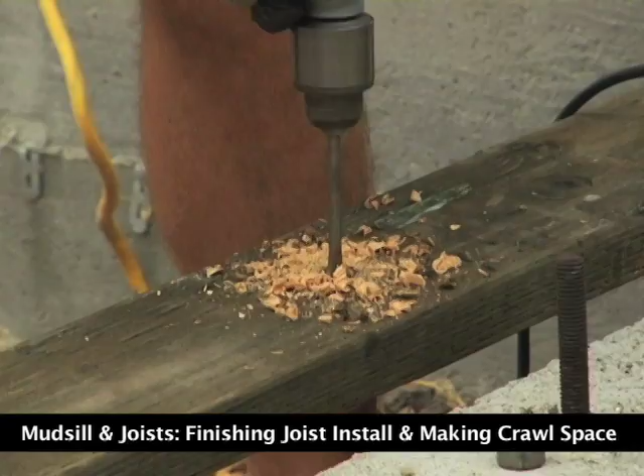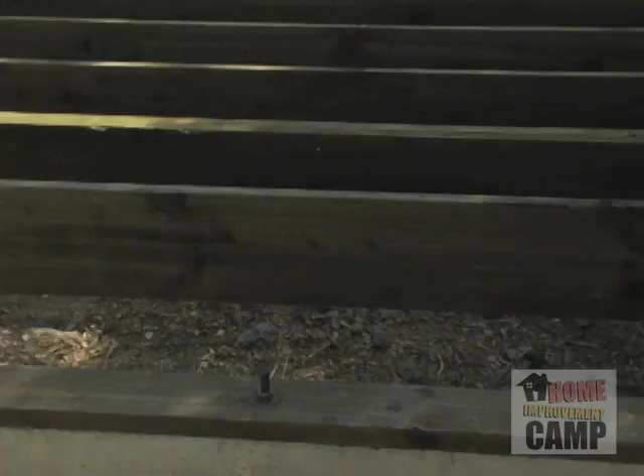All right, so what I'm doing here is I'm cutting some blocks because we have a rim joist on one side of the project here, and we have cantilevering joists. So in between these joists, we have to put blocks to keep them from twisting.

So since our layout is 16 inches, take 1.5 inches away from that, so it's 14.5. But we take a smidgen more, so generally we do 14 and 7/16. So we make a mark at 14 7/16 and we cut a bunch of blocks, and we have those on hand, so as we're laying joist after joist after joist, we can tie the blocks in as we go.

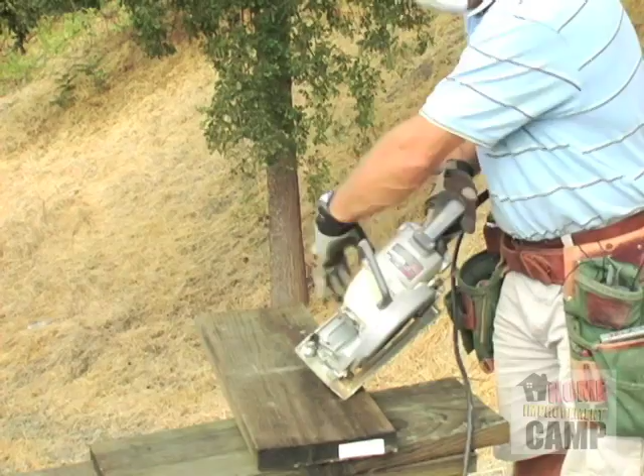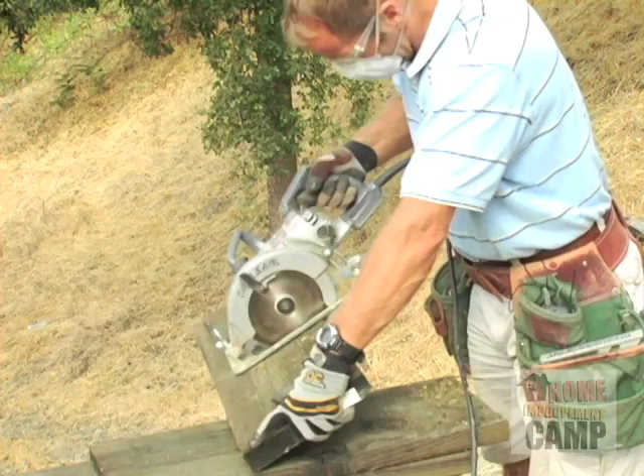So here I've marked it 14 and 7/16. Making sure that my block will fall away when I cut it, and I don't want any binding, so I hold it on this side and cut it on this side. All right, I'll count out how many I need, and I'll cut those out, and then we'll lay the joists.

I'm going to start at the far end, so I've measured from the inside of my rim joist to my first line. Now, if the X is on the far side of that line, you'd have to take 1.5 inches off. But since my X is on this side of my line, and my rim joist is here, I measure to that line, and that's 5 5/8.

So my first joist, since my layout started on this side and went all the way down there, I have a smaller area between my rim joist and the first joist in the far end. Hope this isn't confusing you. But the bottom line is, since I'm starting at the far end, I've just measured what I need to get on layout. Put that small block in there, and then I'll put in my first joist, and then I'll be on layout, and we can just come right back to our starting layout.

If you want, you can start on the beginning of layout, which is probably simpler. I'm just doing it because it's easier to see when I'm down there. But you can start on layout and just keep going and going and going.

Now bear in mind, here's a note that on your layout, your first joist will be kind of like a rim joist, and then your second joist will be cut. That distance will be a little bit shorter, say 3/4 of an inch shorter, because on layout, well, it just will. I don't have to get into it too much.

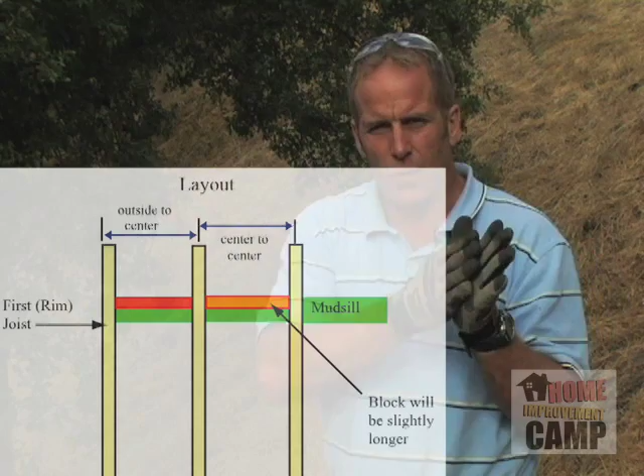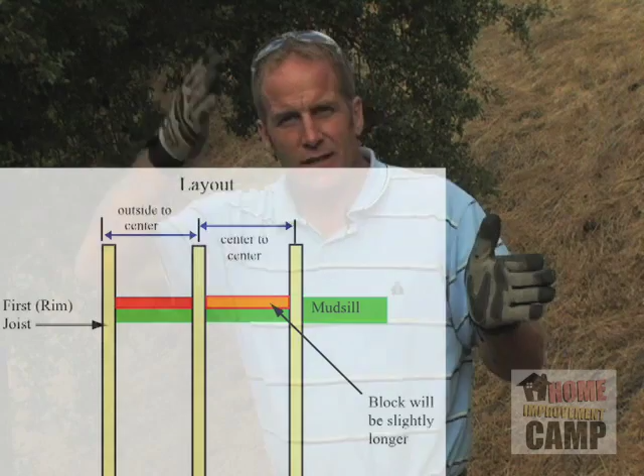So when you cut your first block to your first joist, don't get all worried that it's not 14.5 inches. It will be a little bit shorter because you are starting from 0 and getting to the first center line. Every other joist will be edge to edge, or center to center, but on the very first one it's outside to center, so it does change the first measurement. The very first layout is outside to center of joist, and center to center, and center to center.

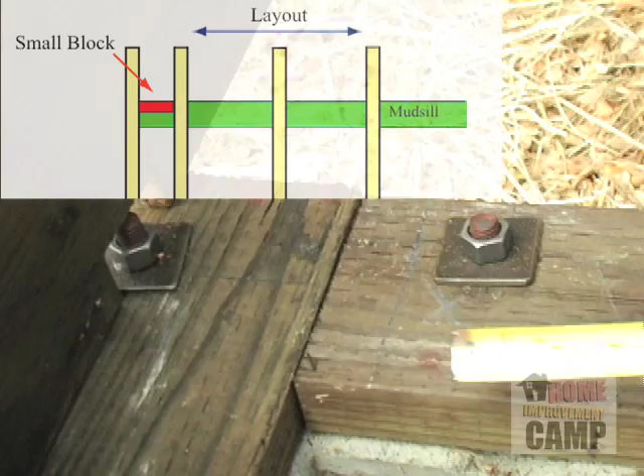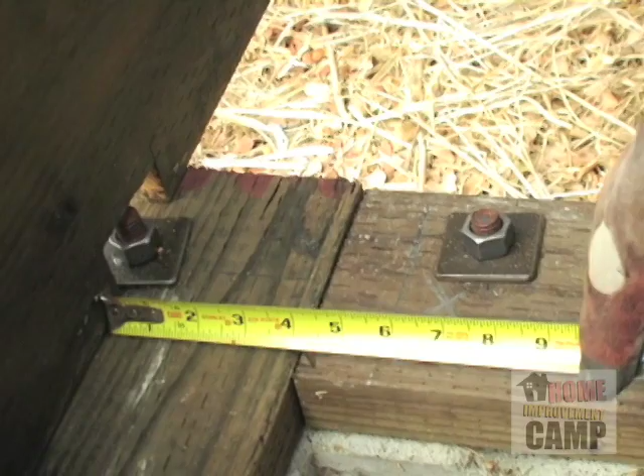All right, we're down here at the end, and we put our tape measure down, and it's just a tad over 5 5/8. So it's 5 11/16. So what we'll do is we'll cut one that's 5 11/16, and then we'll get back in here and we'll put in our next block, which will be on layout, and continue on.

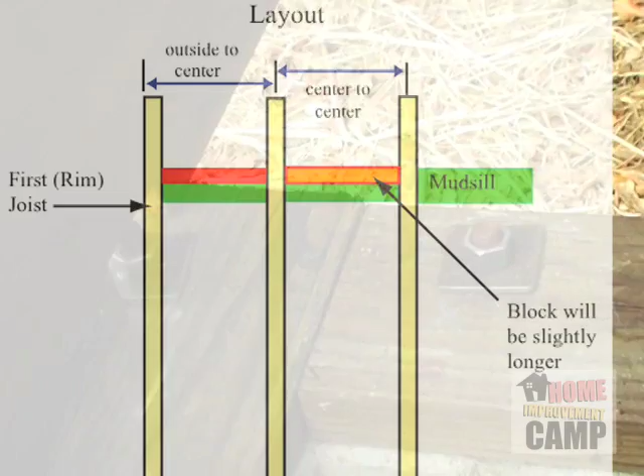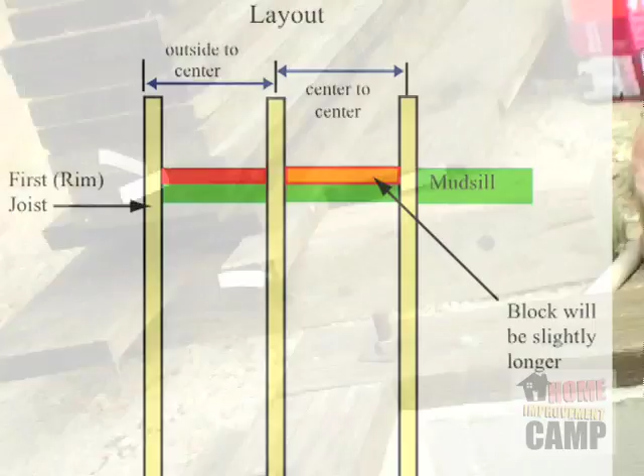But I want to show you over at the beginning that point that I just mentioned about when you put your first joist in, this is a rim joist, to your second joist, and what the measurement will be there. You recall that when we laid this out, we came 16 inches on layout and then came back 3/4 of an inch to get our line. That gives us center line of our joist.

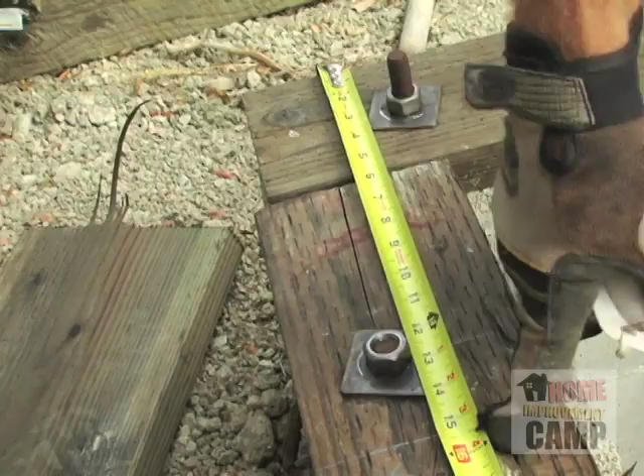Now you'll notice that we're at 15 1/4, and once we put our rim joist on here, that's going to take 1.5 inches, which is 14 1/4 less a half, which is 13 3/4. So that's going to be basically what your block is.

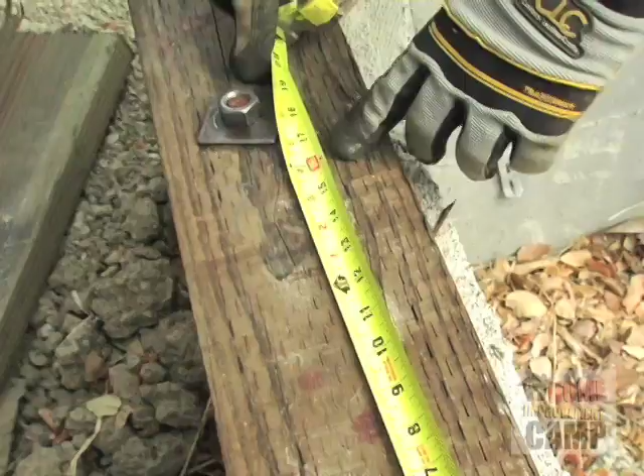So your first block is going to be much shorter, like 13 3/4, and then your second block will be right there at 14.5. It'll be 16 less 1.5 inches, which will be 14.5. So don't let that worry you that that first block is small. Everything will go good from there.

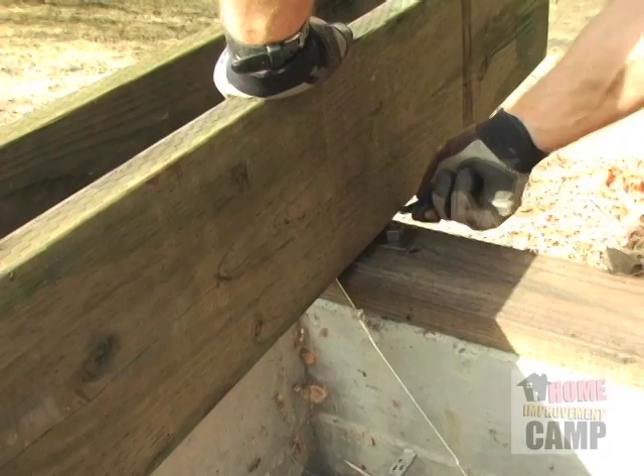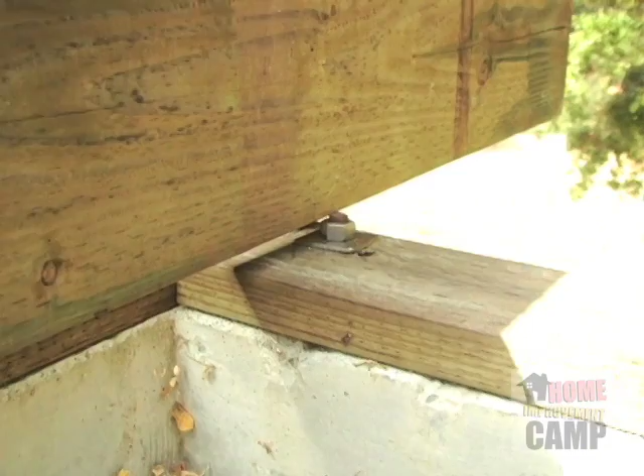Okay, naturally my first joist needs to be notched out for an anchor bolt. So we'll notch that out and we'll get back here and we'll throw that in. But while I'm here, I know that my block is also going to run in there. So why don't I notch out my block as well, save me a trip.

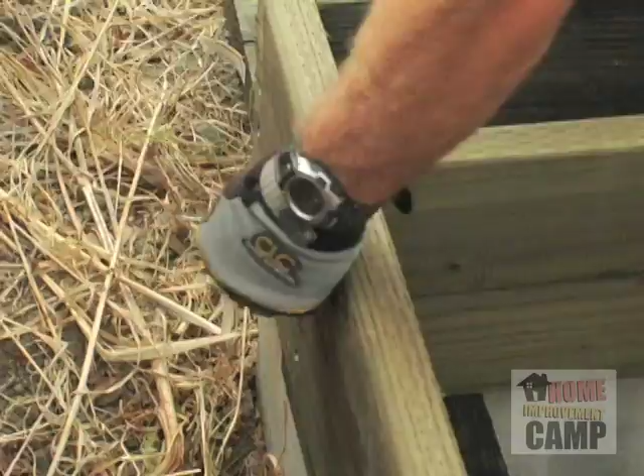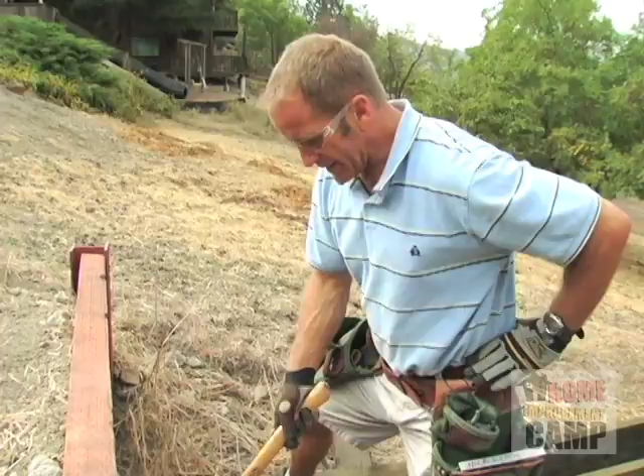When you're hitting the nail in tight quarters like this, you don't get a good full swing. So what you want to do is just basically use your wrist and kind of relax a little bit, because the hammer wants to do the work for you. All the weight's down here and you can just let it kind of drop onto the nail. With a little bit of effort you can get quite a bit of power. Don't use your elbow. Don't try to get your whole arm into it, because you just don't have the space, and besides your elbow will wear out after a few years.

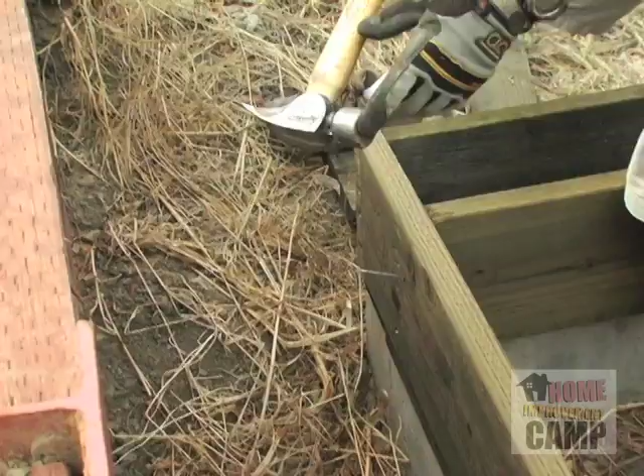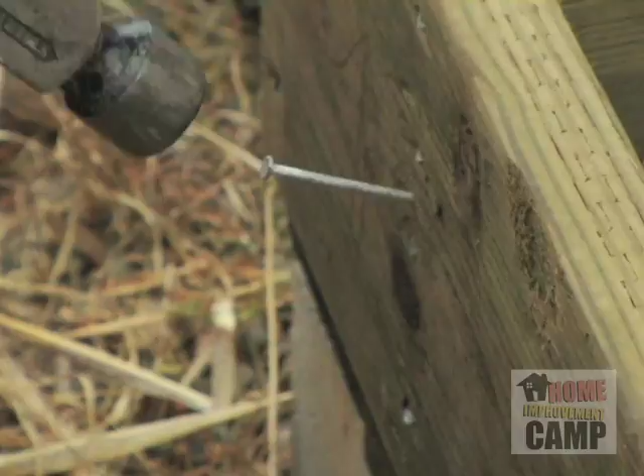The other thing to bear in mind is you want your hammer head to be right square with the nail. If it's not like this, you'll see that the nail immediately will dive off. That'll be your first clue. So people, when they're nailing, they realize, wait a minute, it's going some other way, and the problem is obviously the face of the hammer is just off. Usually they can get it straight pretty much this way, but this way is a little difficult. So just keep in mind that the face of the hammer really needs to strike the nail flush, flat to flat. And just use your wrist, and the nail should go in for you. And that's how you nail in a tight area.

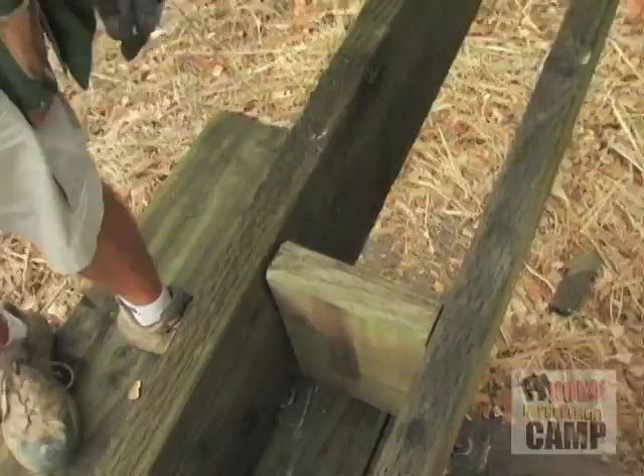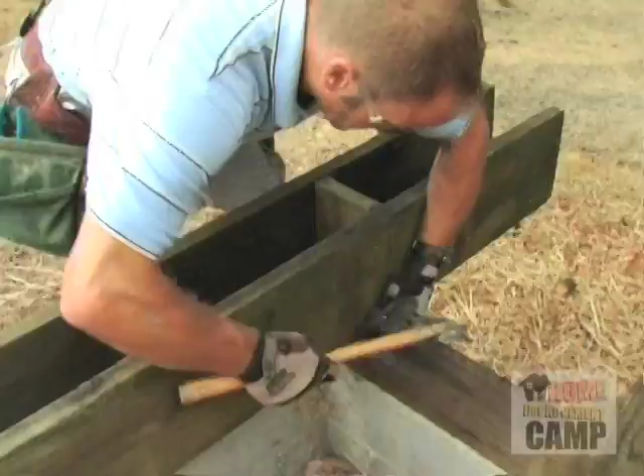All right, here we are at the far end of our project. We have our rim joist, which is our first joist actually, and then we have our second joist. I've cut my block, and I just put it in, it may be hard for you to see, but I just drop it in there right at the edge of the mudsill. So it's just straight up and down at the mudsill. Okay, then I'm just going to get in here and toenail my joist in, tighten it up. Maybe another one.

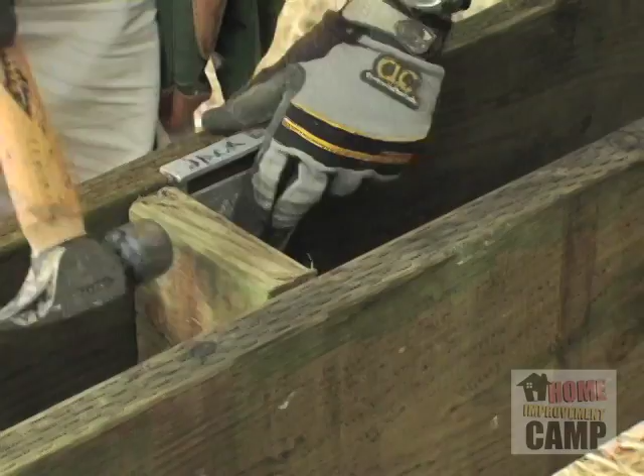Okay, and my block's in there a little bit tighter. I want to put my square down there and make sure it's nice and straight up and down. And then I'll tie this all together. I'm putting a nail in this one because this is up a little bit and I want to drive it down. Okay. And then I will continue to nail this all off.

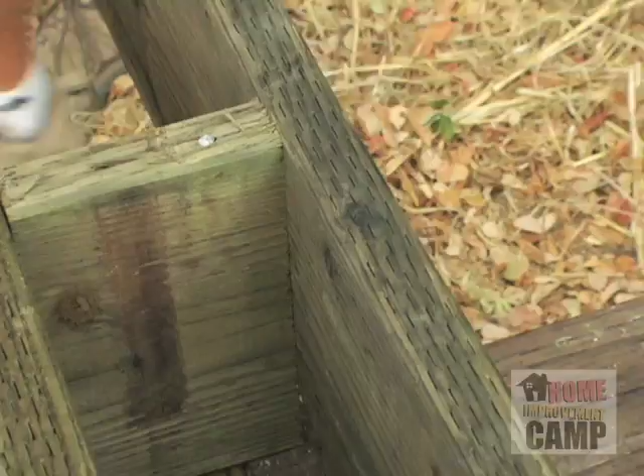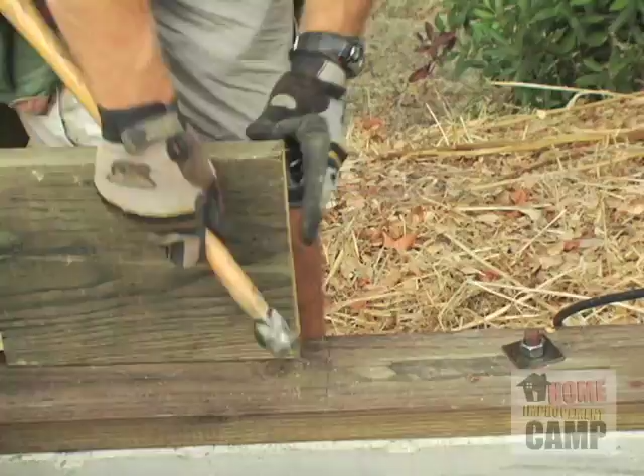Now this is where we get moving on to our next joist. First thing we want to do is put in our first block. And what you do is you put a toenail at your block, like this. Now that sucks it right up to the other joist, okay? And leaves us just a tad over 1.5 inches. Now you're probably going to gain a little bit as you go, so being a little bit shy right here isn't a concern right now. Now I have this block to go off of because I know it's straight up and down. Put a nail in here.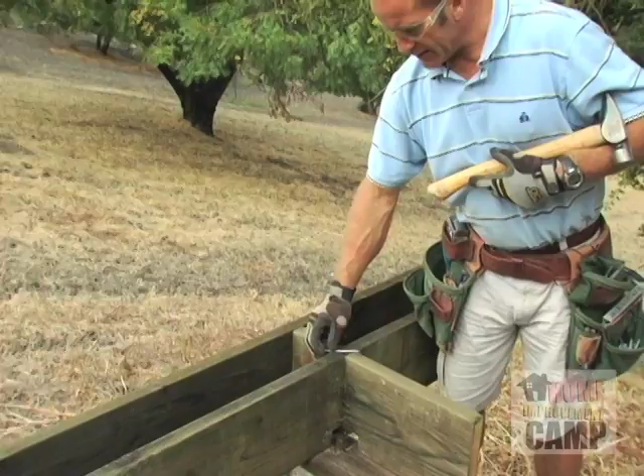And then what I do is I toenail my block into here. If I had room to swing inside these joists, I could probably put nails at a slight angle into this block like this. But as it is, I don't have that ability. I can't get my hammer in this tight area. So what I'm going to do is just put some toenails in. I'll do it from the inside in case any of my nails pop through a little bit.